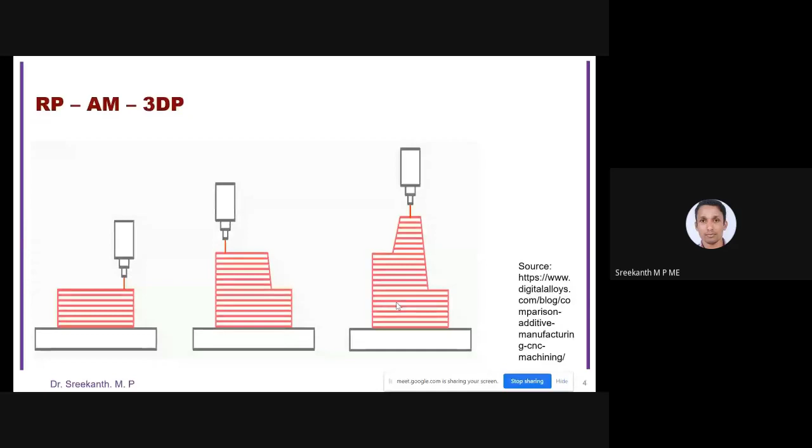Additive manufacturing is also called advanced manufacturing, 3D printing, fabrication, direct digital manufacturing, and many other names. A lot of names are used for this series of technologies, but they are all the same. The main idea is that a CAD model is transformed into a product through a series of technologies by adding one layer over the other. That is the basic idea behind this technology.

Hello sir, voice is breaking, sir. If you change your position, sir, just one or two feet, to present, sir. Hello sir. I think sir has left. Yes, I think so.

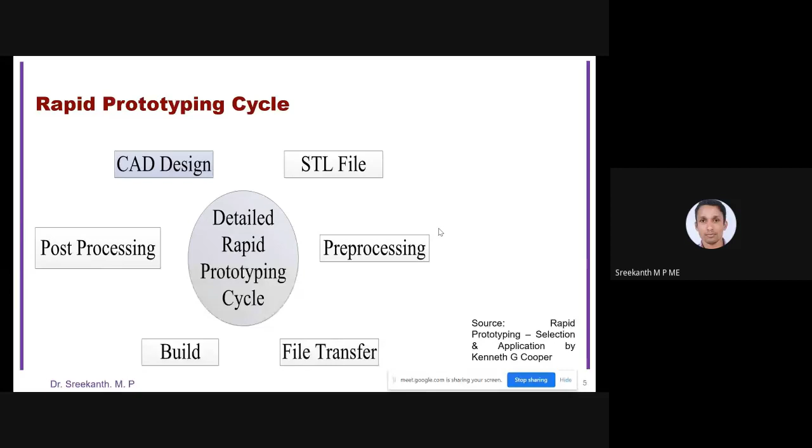Okay, so this is actually the rapid prototyping cycle. This is happening from CAD design to the build stage, then to post processing. So we need some operations, maybe you have to remove the support structure, those things.

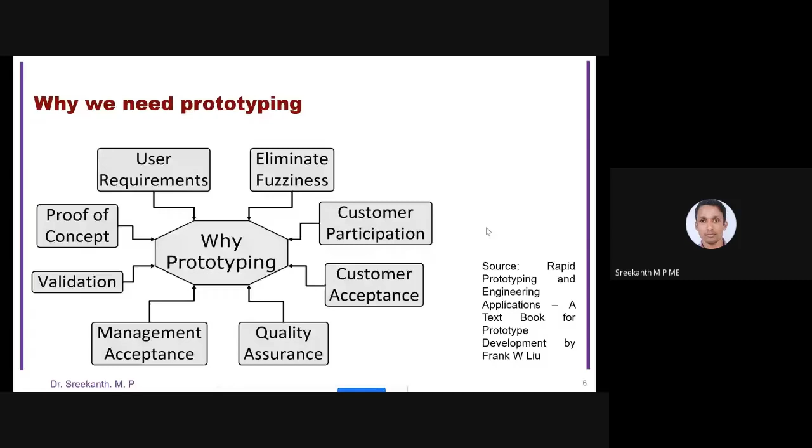Then customer acceptance, meaning you can show this prototype to the customers, then easily get feedback from the customer and go for a better design. Then quality assurance, so quality can be assured before prototype testing. Then you can show this prototype to management for getting approval. Then proof of concept, meaning within the team itself, you can get approval from the design team using the physical prototype, so you can eliminate the drawbacks. Then validation, final validation also you can use prototyping for. So in product development stage, at several points you use this prototype process for eliminating the fuzziness and improving the design. That's why we need prototypes.

Then when you go for additive manufacturing, there are different series of technologies available. Formerly the classification was liquid based, solid based, and powder based. But in 2012, ASTM, the American Society for Testing and Materials, came up with a classification for additive manufacturing, in a committee called F42, identifying seven series of technology: VAT photopolymerization, material jetting, material extrusion, binder jetting, powder bed fusion, sheet lamination, and directed energy deposition. Whatever existed in liquid, solid, and powder-based technologies is the same here, but they classified and made a standard for this classification of additive manufacturing technology. I will discuss some examples of these technologies in the coming slides.

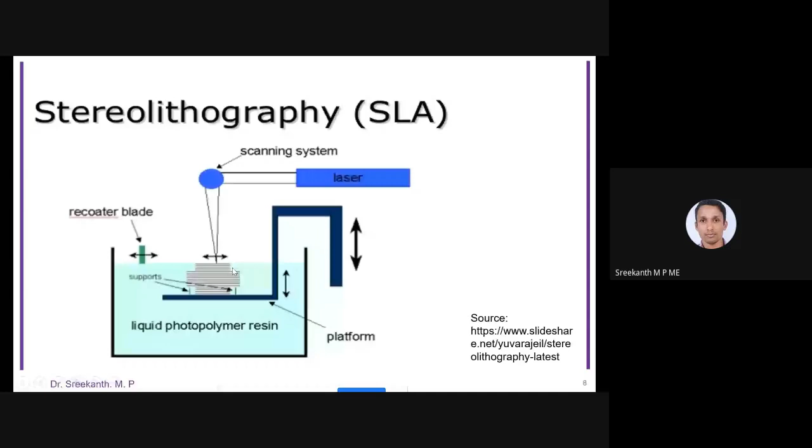Stereolithography - why I choose this first is because this is the first machine developed in this technology, developed around 1988. We use a photopolymer resin in a tank, keeping a platform inside it. The specialty of this photopolymer is that the correct intensity of light, if hit on that surface, will get it solidified. Initially this table will be at the top of the photopolymer resin layer, then it will go one layer below that. This is stereolithography, a liquid technology because the starting material is in liquid form, and this is comparatively older technology.

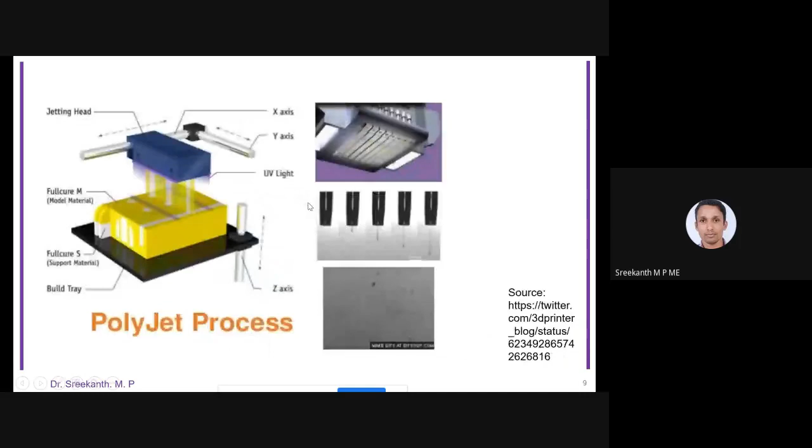This next one, fused deposition modeling, comes under the material extrusion category. FDM is one of the most widely used technologies in 3D printing or additive manufacturing. Here we use a wire form or filament, so another name for this is fused filament fabrication, FFF or FDM. Both terms are used.

For support material and model material, there are two separate spools. These come through a nozzle into the chamber, where the temperature is controlled. This gives it a semi-solid state, and it gets deposited on the table. Normally at the initial stage, the table is at the top of the machine, then for each layer it lowers to the bottom.

Then selective laser sintering. Nowadays FDM has even started printing metal. Another technology is selective laser sintering. Sintering temperature is normally around 70-75% of the melting temperature. This is a powder-based technology, whereas the previous one, FDM, is a solid-based technology using wire.

In this powder-based process, there is a powder delivery system and a fabrication piston. The material is supplied to the fabrication piston, and using a laser, you sinter the material. In sintering, high temperature is supplied to the material, and because of that, these powders fuse together.

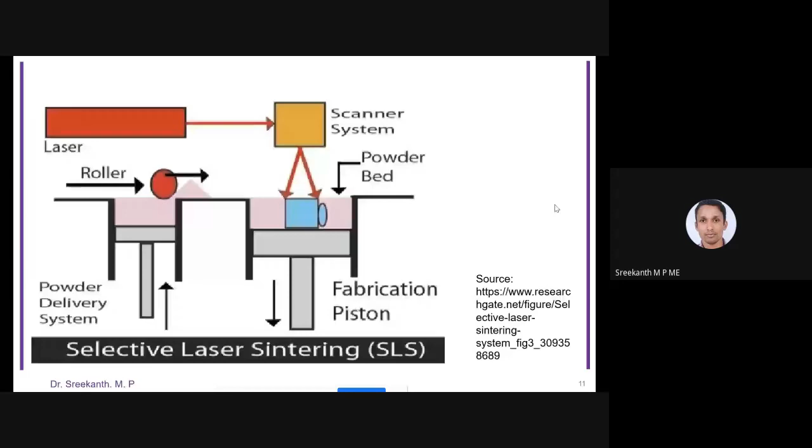Then binder jetting, also a powder-based technology. This was normally the first technology actually called 3D printing itself. Nowadays we use the term 3D printing for this whole series of technologies, but the name first came from this binder jetting process. Here, instead of a laser, we use a binder for fusing—sticking these powders together. In selective laser sintering, selective laser melting, and binder jetting, you can use metals.

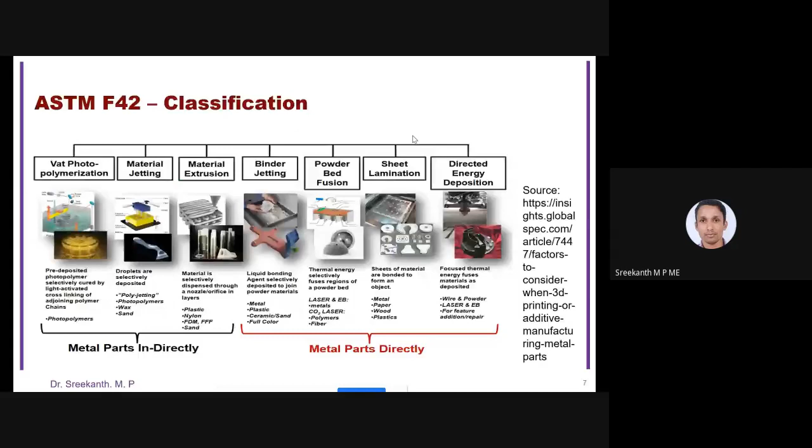Next is laminated object manufacturing. This comes under sheet lamination, the sixth category. So powder bed fusion includes selective laser sintering and selective laser melting; 3D printing and binder jetting processes are separate. Selective laser sintering and selective laser melting come under powder bed fusion.

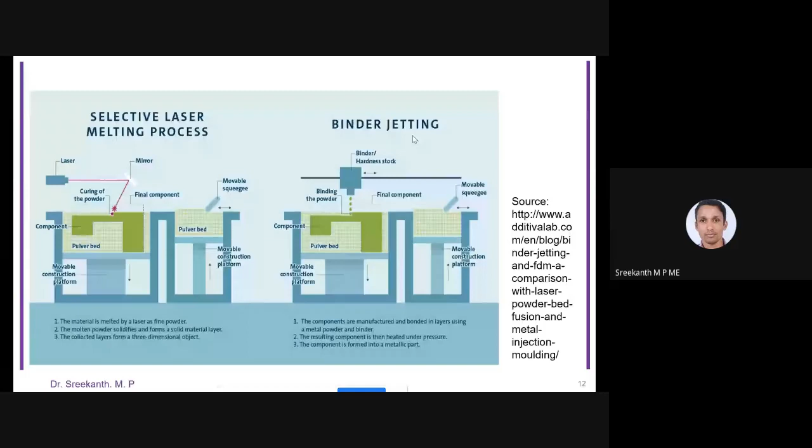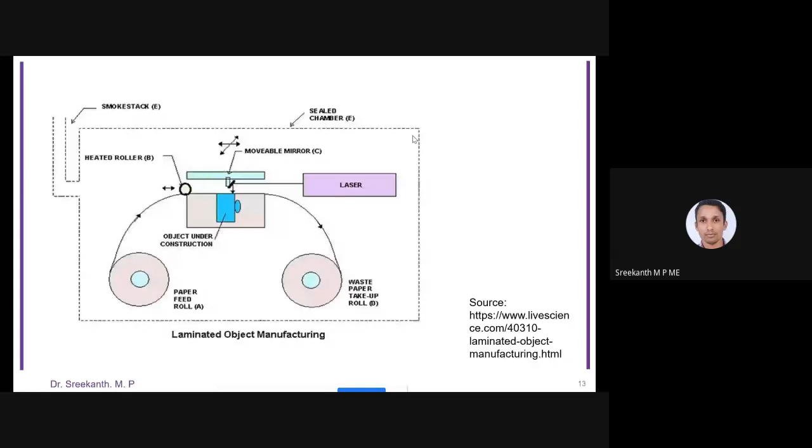Laminated object manufacturing uses sheets—a sheet of paper or other materials. In previous applications it would come under solid-based technology, whereas powder-based is different. Instead of powder, here we use a paper form or laminated sheets. We also use a laser here, but one of the main problems of this technology is fume—a lot of fume is generated while using the laser, which becomes a problem, so you have to ventilate it. That is the main drawback of the system.

Then there's laser engineered net shaping, which comes under direct energy deposition, the last method. There's another direct energy deposition technique I'll tell you about too. Laser engineered net shaping is a laser-based and powder-based technology. The powder is supplied through some tubes, and the laser comes in—when the powder... I hope you can see my cursor, correct?

You can see my cursor. So through these blue channels or blue tubes, this powder will come nearer to the exit of the nozzle. Same way that laser will also reach that point. What will happen because of this laser? This powder will get into a solid state or maybe molten state. So together, this laser energy and the powder will paste or fall on the table. That's what is actually called direct energy deposition. Laser energy is deposited on that.

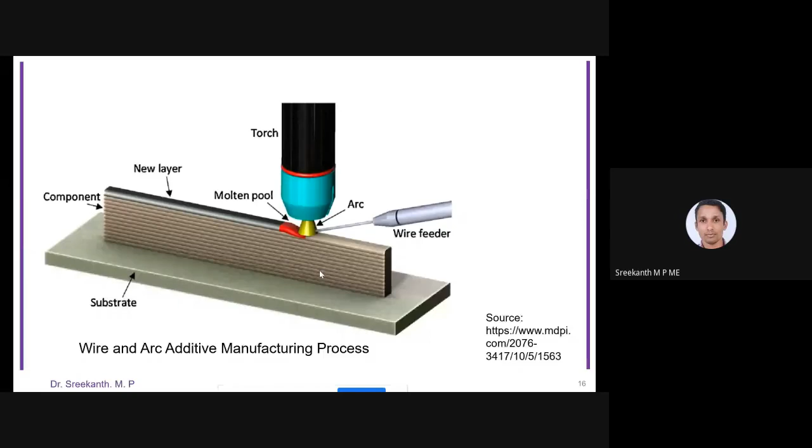This is actually molten wire and arc additive manufacturing process. This is similar to whatever welding process we are using. Here the model material will be in filament form, and that will come to the torch. An electric arc will be generated there, which will fuse, meaning melt this filament, and then it will deposit on the table. This is one of the newer developments, keeping the advantages of welding and additive manufacturing, both.

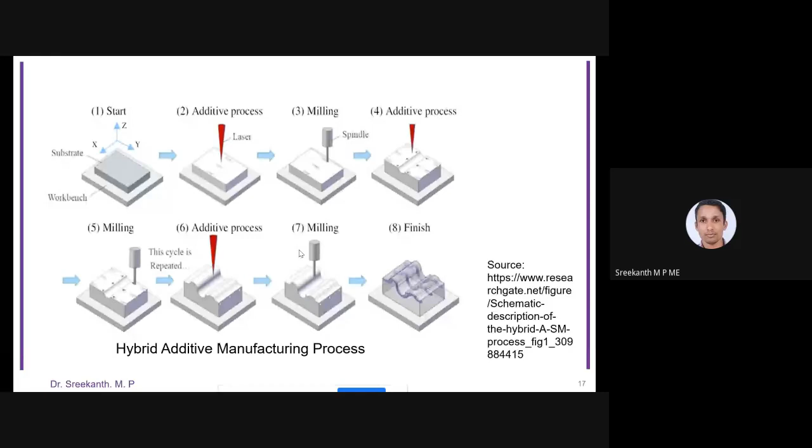So next one is hybrid. Nowadays some more development is coming in this hybrid additive manufacturing process, meaning subtractive and additive processes are glued together into this technology, so that both advantages can be exploited. Some processes will start with milling process. So the example given here is hybrid additive manufacturing milling process. First, for a few steps you use this milling process, then you will switch over to the additive process the same way. This is actually a newer development in additive and subtractive manufacturing.

So next, what are the powder size, filament diameter, and layer thickness we are using in this? Normally the powder size will not be exact because it will be different for different technologies. If you are using the same powder size for laser engineering net shaping and EBM, it may not work properly. Even for electron beam melting process, different companies developing machines may vary the powder size. Actually it is 20 micrometers to 150 micrometers - that is the normal size of powder used in additive manufacturing. Filament diameter normally used in FDM is approximately 1.78 mm to 3 mm. Layer thickness is different.

That is the thickness of the layer for what we are depositing in one layer. That is the deciding factor for resolution - how much accuracy we can achieve, because in additive manufacturing one main problem is that curved surfaces show a staircasing effect. So it won't be smooth, and for that you have to keep the layer thickness as minimum as possible.

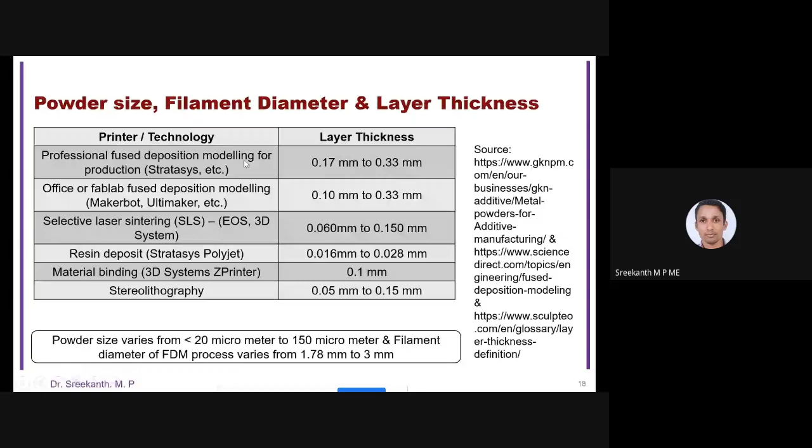Different technologies have different layer thicknesses, like 0.05 to 0.33 mm across different technologies. In stereolithography it is 0.05 mm, but for fused deposition modeling it will be minimum 0.17. Newer technology may be developing, and we can expect more advances in this.

Main industries - Wohlers, you may or may not have heard about that. Wohlers Associates is a company where every year they publish a report. It tells about the current status of additive manufacturing, what development we can expect in the next 5 or 10 years, and the main important machines being produced and supplied worldwide.

This report is like a Britannica for additive manufacturing. You can see the main resources or industries using additive manufacturing, that is consumer products. Normally for consumer products and motor vehicles we are using additive manufacturing at large scale.

Government and military agencies are using it, and architectural for building development and building construction. We use additive manufacturing for prototyping, and in Dubai and some other countries they have already built fully functioning buildings using additive manufacturing.

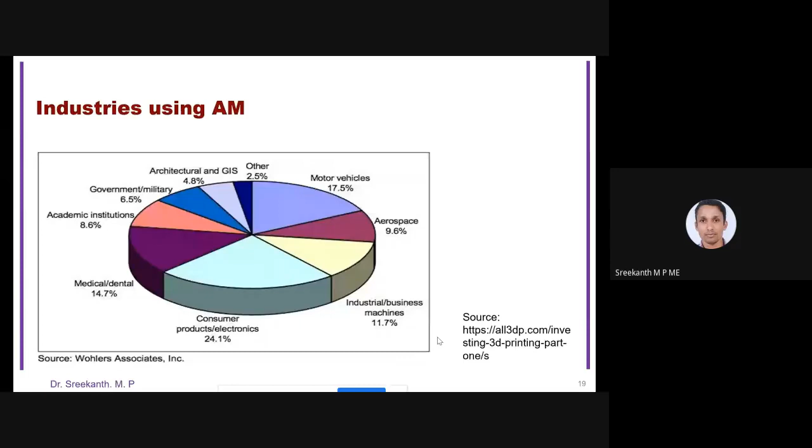Some products we can expect from additive manufacturing - these two buildings are in Dubai and China, developed using additive manufacturing.

Cranioplasty is a medical application - if the skull is damaged due to an accident or something, you can scan that area and create a customized part using additive manufacturing, and fix it.

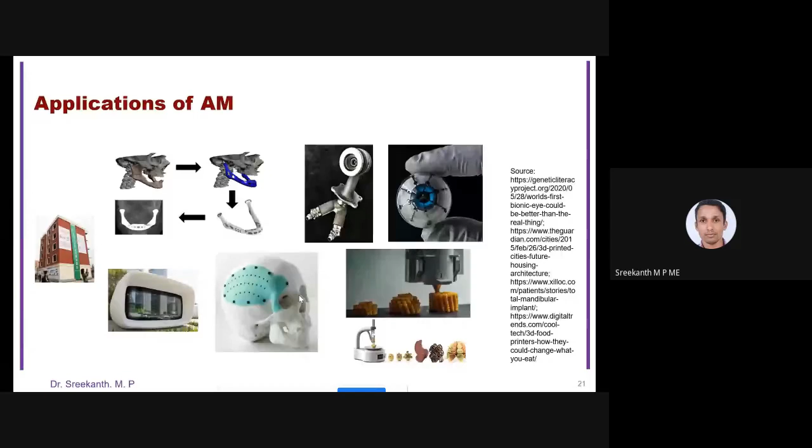These lower jaw applications are also medical applications. You can scan the lower jaw portions by MRI or CT scan, use that scan data in 3D modeling software to develop a 3D model, print it using additive manufacturing, and fix it to the affected person.

Then this is for their rocket engine, aeroplane engine - different areas where we are exploiting the capacity of additive manufacturing. This just shows what the capacity of additive manufacturing is.

So the main research areas - you can think about different types. One is new material development. As you know, the materials available are very limited in our additive manufacturing process, but you can think about new material development.

There are difficulties - you have to make the wire. If you are developing a material for such a process, you have to develop a wire form of this material, so ductility should be there.

Then characterization of new material development - based on that, you can characterize the material properties, that means tensile properties, other mechanical strength, wear properties, all those things.

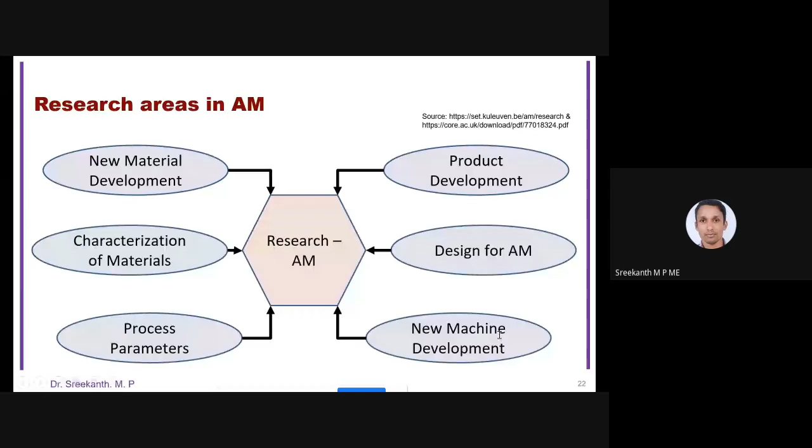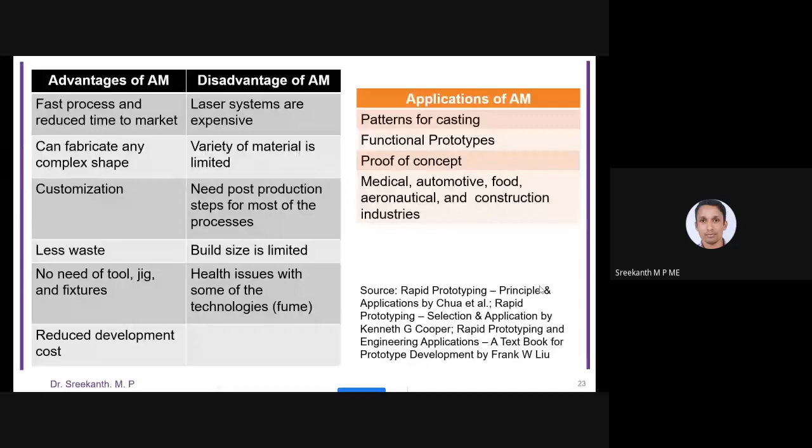The main advantages and disadvantages of AM. Advantages are: fast process, it is very fast because we don't need a tool, jig or fixture, and those things we can eliminate, so cost can be reduced using those capabilities of additive manufacturing. It can fabricate complex shapes. There will be some limitation, but comparing to conventional manufacturing process, a high degree of complexity can be achieved. Individual customization, even personalized products, can be achieved through additive manufacturing.

In subtractive manufacturing, a lot of material is wasted, this is more. But here you are adding material, so there is a development in cost and time, which is a main advantage.

The laser system is expensive, it is based on laser systems. That's why the variety of material is limited, material availability is very less. Then almost every technology needs post production steps, maybe a final manufacturing process to finish the product.

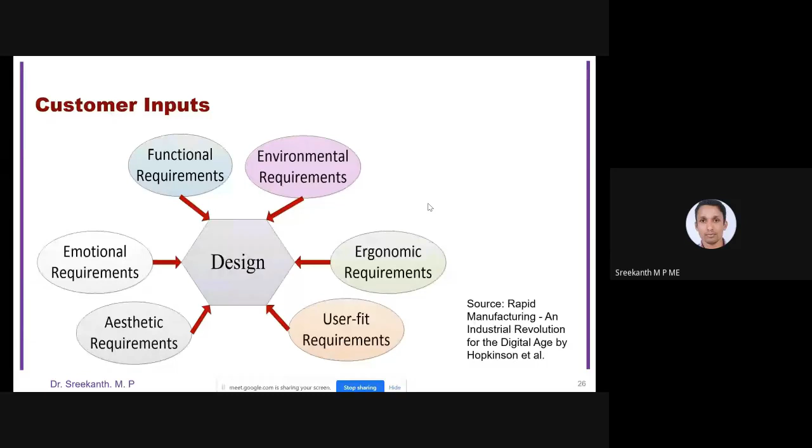Then aesthetic requirements - this is actually very difficult to define, because aesthetic requirements may involve color. That means you may be liking one color and I may not like that particular color. So that's why manufacturers are giving different colors for this car, right?

Sir, audio breaking, sir. Breaking. Audio break. I'm really sorry, sir, I don't know what is actually happening. Yes, this sir, continue sir, no problem. Oh sir, yeah okay, now it's here right? Now yes, it's clear, continue right? Continue sir.

So when you are coming to ergonomic and anthropometry, how the worker is interacting in the environment, that is ergonomic. And anthropometry is a part of this ergonomic.

You can get that. So, anthropos measure - anthropos means human, and here you are collecting the anthropometric data for your product.

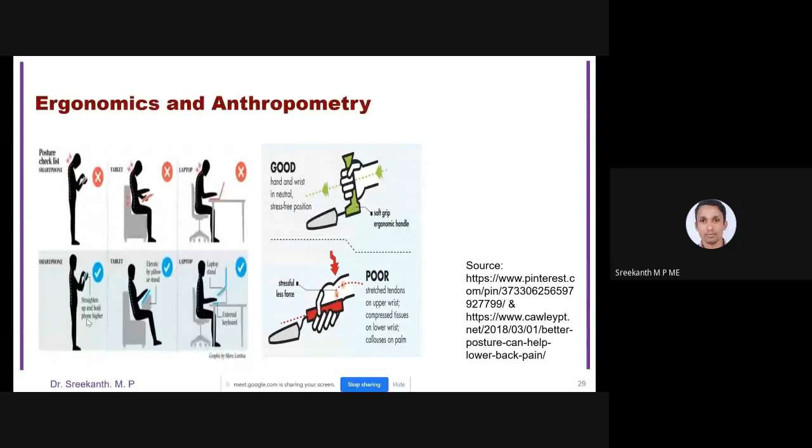Okay, so now I will come into the research, or what my experience is for research. So actually, discussed with my guide, we started with the hand size being different. It is actually varying from individual to individual.

So based on that, why can't we design a hand tool design? That means the handle used in surgery, the hand tool used by the doctors, so that we can redesign it. Based on that, I went through this literature in healthcare sectors and all those things.

So that means the healthcare sector is giving services in 5 different systems: hospitals, pharmaceuticals, diagnostics, medical equipment supplies, and medical insurance. Diagnostics normally means laboratories. But here the other 4, other than this, those actually need no engineering aspects. The doctors are doing it, or pharmaceuticals are doing it, the laboratory persons are doing it, or maybe the insurance companies are doing it. So there the engineering application is very less, actually nil.

So one area we can concentrate on for engineering applications is medical equipment and supplies. This is the area we can concentrate on. This will include all the equipments, hand tools, surgical tools, etc.

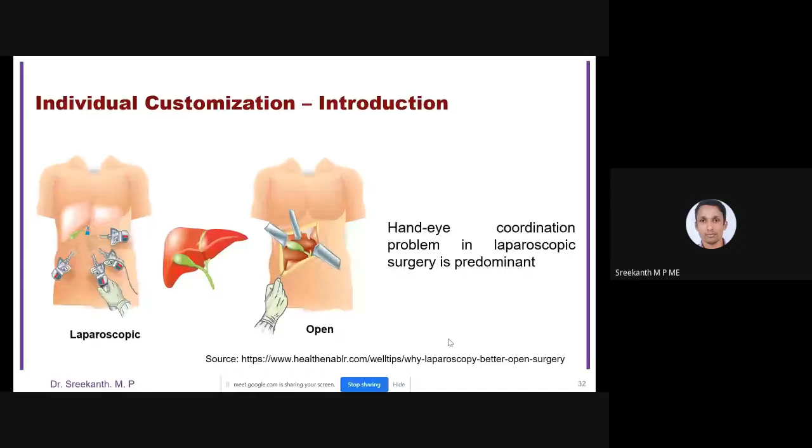So based on that, I conducted some survey means, identifying where there is more pain, and by using laparoscopic surgery, which body part gets more pain, and what instrument, which type of instrument is actually causing the pain.

Based on the survey, we identified that the main areas are hand and neck - these two areas have more pain. For the hand, I identified that it is the forceps, a tool used for laparoscopy surgery, that is actually causing more discomfort while using it. Other tools like needle holders, scalpels, staplers are there, but there's more pain with this one. So I concentrated on redesigning the forceps.

One more thing based on this survey - I don't know exactly, but maybe around 120 people I actually contacted. So the data may not be perfect, but for continuing my research, this data was useful.

Next, these are the hand data - hand anthropometric data I will collect, using a tracer method. That means I will trace the hand profile of a subject, and take the dimensions of circumference, length of fingers from that.

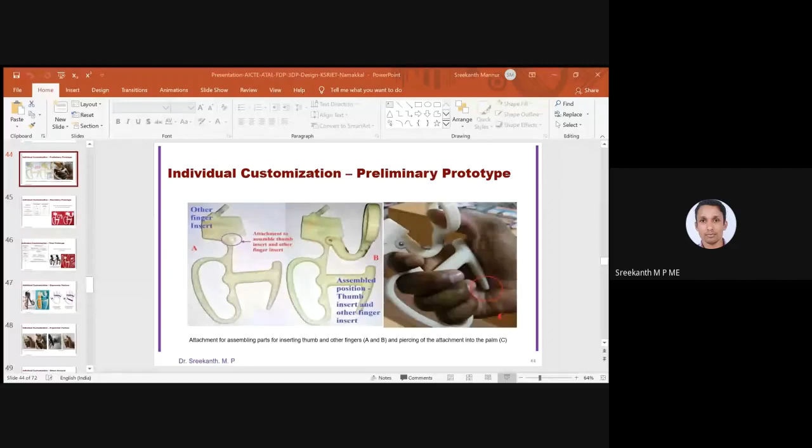So we already have this CAD model, and alteration in the CAD model is very easy. We can easily change the dimension and get a new product. So the base model is in CAD, and if a surgeon approaches me needing an individually customized model, I will get the hand data of that particular person.